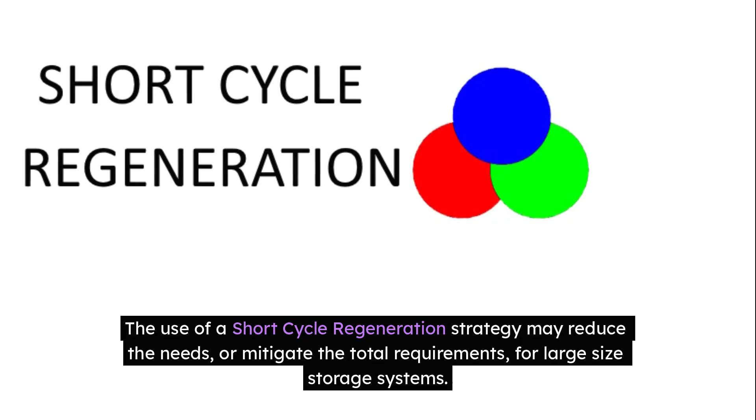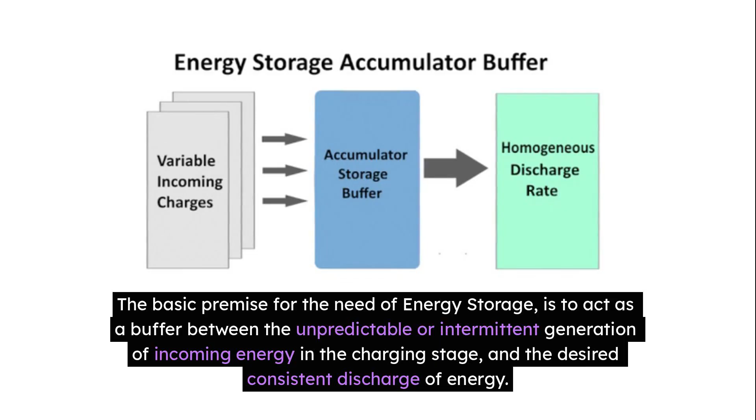The use of a short-cycle regeneration strategy may reduce the needs, or mitigate the total requirements, for large-size storage systems. The basic premise for the need of energy storage is to act as a buffer between the unpredictable or intermittent generation of incoming energy in the charging stage, and the desired consistent discharge of energy. The range of the buffer may be determined by the gap in time between the total incoming volume of energy and the desired output flow rate.

An ideal storage buffer maintains sufficient reserve capacity both on the charging and discharging sides to maintain consistent power output, to operate around the clock, 24/7 all year long. The size of the energy storage capacity may be established by the duration or desired reserves of output for the time period selected. The major limiting factors in establishing an energy storage system are largely determined by the acceptable capital cost of the system itself, and the energy conversion losses inherent in the storage method chosen.

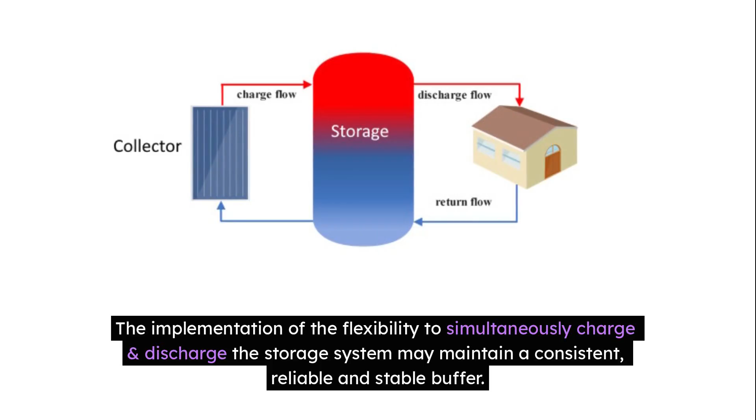The three main steps in the energy storage cycle are the charge cycle, storage stage, and discharge cycle. By disassociating the charging cycle from the discharging cycle, a storage technology may achieve the function of a time-shiftable energy storage system. The implementation of the flexibility to simultaneously charge and discharge the storage system may maintain a consistent, reliable and stable buffer. The common sources of energy used to charge an energy storage system tend to be unpredictable or intermittent types of generation. An ideal energy storage system is designed to accommodate the fluctuating flow of incoming power.

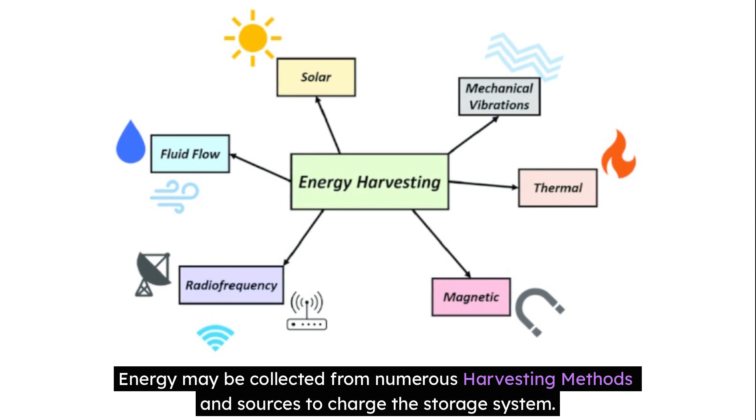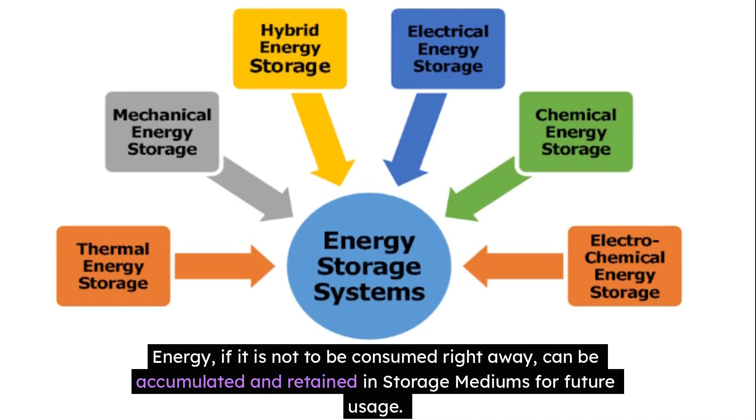Energy may be collected from numerous harvesting methods and sources to charge the storage system. Energy, if it is not to be consumed right away, can be accumulated and retained in storage mediums for future usage. The two basic approaches to energy storage are in the form of either electric charge storage or in the form of a non-electric charge alternative potential energy storage medium. The traditional electric charge storage thinking surrounds the storage of surplus electricity in the form of battery storage in electrochemical batteries and has expanded to include capacitors and flow batteries.

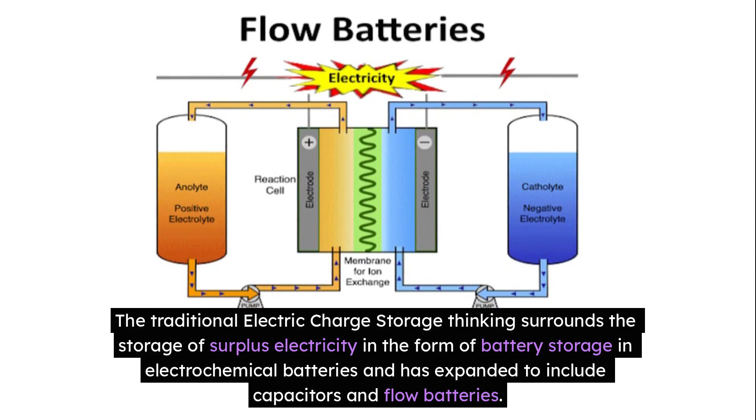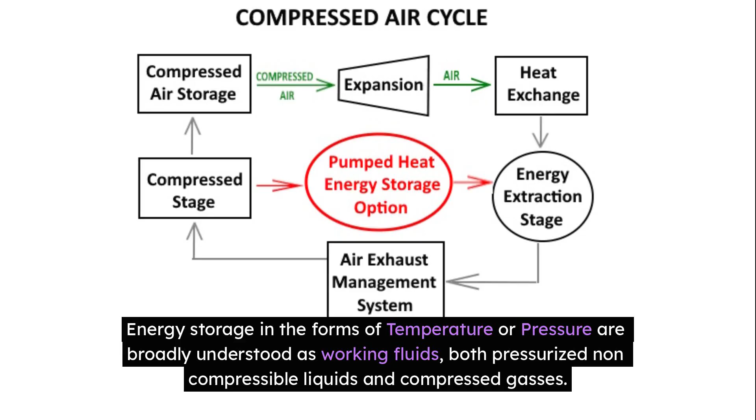Energy may be collected, consolidated and stored in various alternative storage medium forms. Energy storage in the forms of temperature or pressure are broadly understood as working fluids, both pressurized non-compressible liquids and compressed gases. Other lesser-known forms of alternative or potential energy are an important factor in the energy recovery, harvesting and storage field. Potential energy storage in the form of materials classed as mass lends itself to short-cycle regeneration.

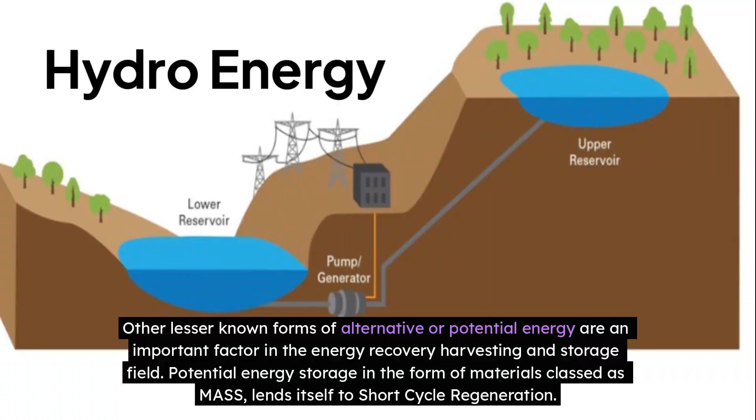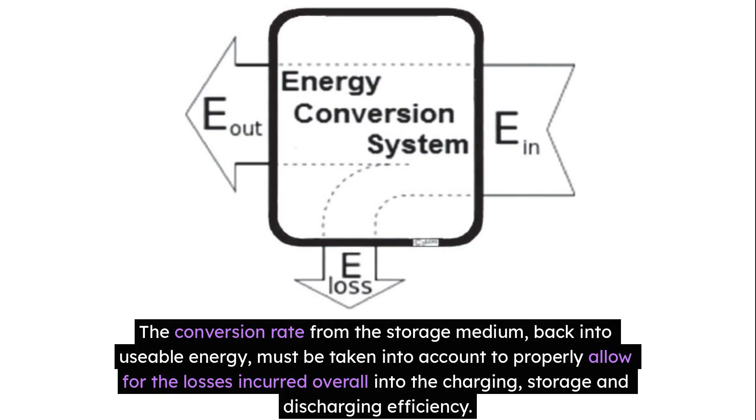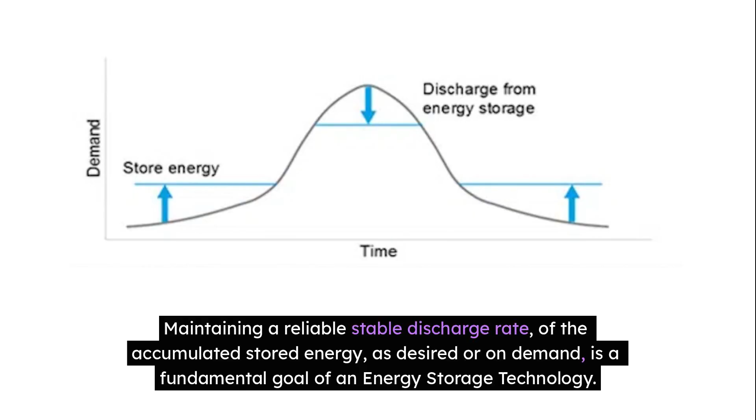Depending on the storage methodology, losses of energy in the duration of storage may occur due to self-discharging rates. The conversion rate from the storage medium, back into usable energy, must be taken into account to properly allow for the losses incurred overall into the charging, storage and discharging efficiency. Maintaining a reliable stable discharge rate of the accumulated stored energy, as desired or on demand, is a fundamental goal of an energy storage technology.

The speed of response when called upon to discharge is an important factor to take into account. The conversion losses of the discharge methods may or may not be a critical factor. A controlled discharge rate may maintain the energy requirements to keep an industrial plant operation supplied with a continuous baseline power input. A properly designed storage system may be compatible with a short-cycle regeneration strategy. The energy storage accumulator acts as a buffer between the highly variable incoming charge rates and a homogeneous discharge output.

Alternative and harvested energy sources are not only intermittent from day to night, they may vary widely from minute to minute in intensity. This continuous fluctuation is contrary to the homogeneous output required to reliably feed the electricity grid. The storage accumulator may accept incoming charges at various intensities and intermittent rates, and act independently of the discharge cycle. The most desirable forms of energy storage buffers may be able to charge and discharge simultaneously. The size and scope of the storage capacity will determine the degree of independence the system may achieve or maintain.

In summary, energy storage may take the form of either electron storage or non-electron storage and allows us the ability to capture energy at one time, for use at a later time when it is needed.